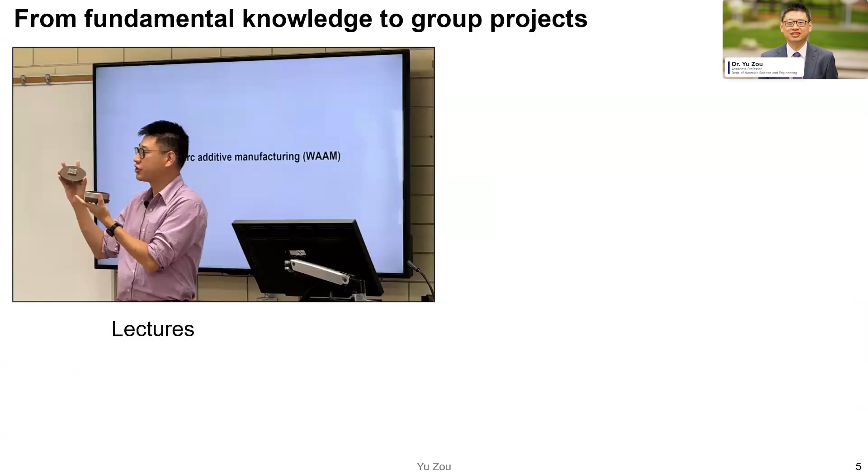It's an intensive course. In the morning sessions, I give lectures on the fundamental knowledge of additive manufacturing, and in the afternoon, students have a group project and discussion with the opportunity to do hands-on projects. Toward the end of the course, students have the opportunity to give a presentation to share what they achieved.

Over the past few years, about 200 students have taken this course, and we've gotten great feedback. Particularly this year, we got a chance to visit our industry partners, and the students had the opportunity to see what's really going on in real industry.

We first visited a company called Burloak Technologies in Ontario, and the students got a chance to see different additive manufacturing equipment, talk to the team there, and we even built up a research collaboration.

The second company we visited is Exco Engineering, a leading company in die casting, where we learned how they use additive manufacturing techniques in the die casting process.

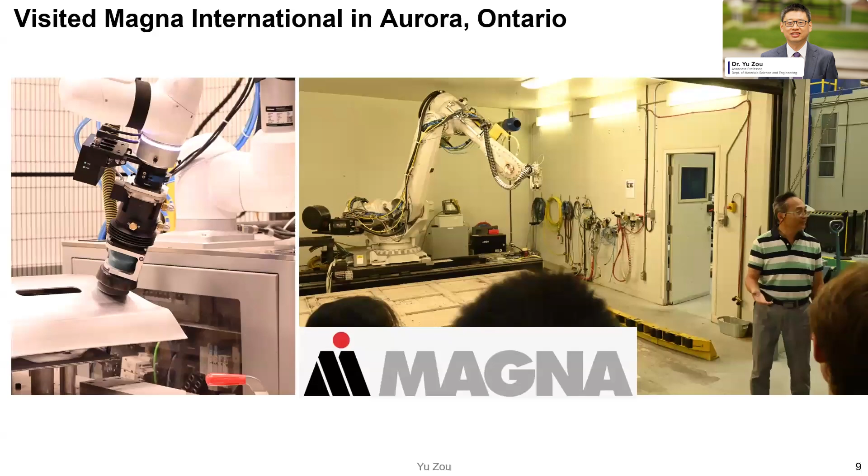Now I'm going to use the next half an hour to give a quick introduction to additive manufacturing techniques and where people can use additive manufacturing.

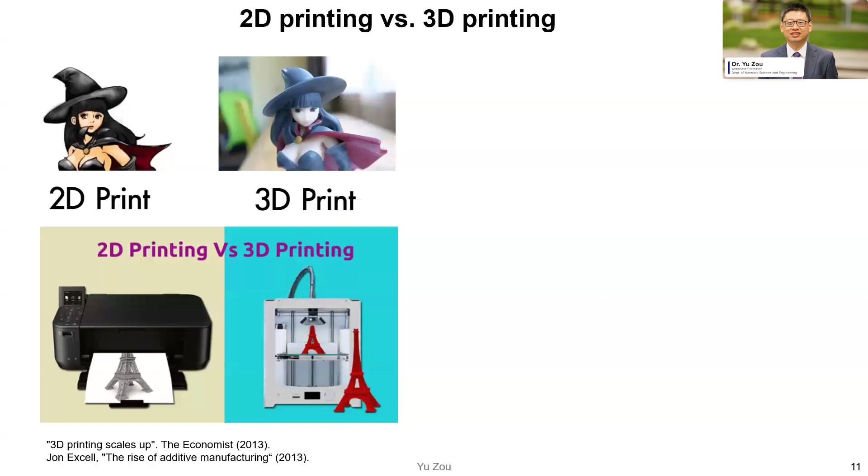First, I want to briefly talk about the term 3D printing. I think most of the audience are very familiar with 2D print and 3D print. Basically, the 3D printing process involves eight stages.

First, we create a CAD file, then transfer it to an STL file, then transfer the file to the machine, and set up the machine with printing parameters. Then you build up your part, remove the supporting structure, do post-processing, and finally move to the final application.

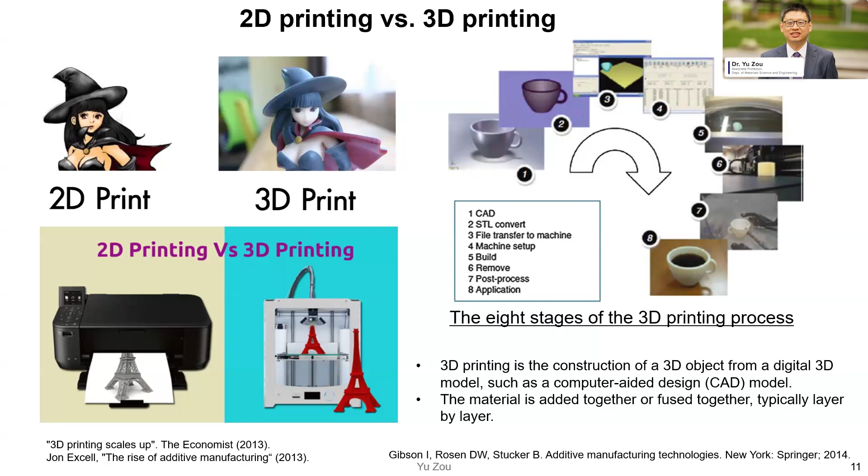The 3D printing process is based on the concept that material is added together or fused together layer by layer. I think most people are familiar with this concept and procedure of 3D printing.

Now people may wonder, sometimes we use the term 3D printing, sometimes we use the term additive manufacturing. What's the difference between them?

Basically, there's not a big difference between these two terms. Additive manufacturing is a formalized term for what used to be called rapid prototyping, or more popularly right now, 3D printing. But 3D printing is generally used to describe entry-level printing processes, like printing polymers. You can see in the image on the right an FDM process, which we normally call polymer 3D printing.

For AM, additive manufacturing is typically used to describe more advanced or precise techniques, for example for metals and ceramics, such as the technique shown here called selective laser melting. Typically, AM describes a professional production technique which is clearly distinct from conventional methods of material removal, known as subtractive manufacturing.

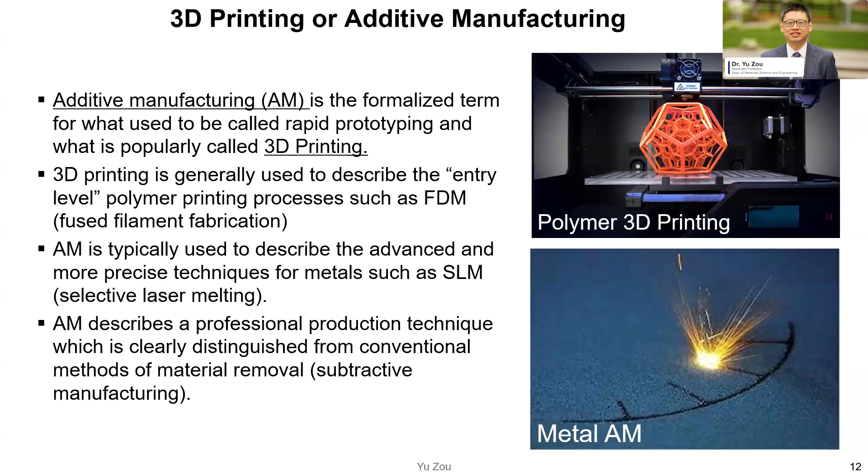People may ask, what's the difference between subtractive manufacturing and additive manufacturing? Here's a comparison. For example, if you want to make a 3D object, for subtractive manufacturing you start with a raw block of material, machine down the parts you don't need, and create a 3D part. But this leaves waste material.

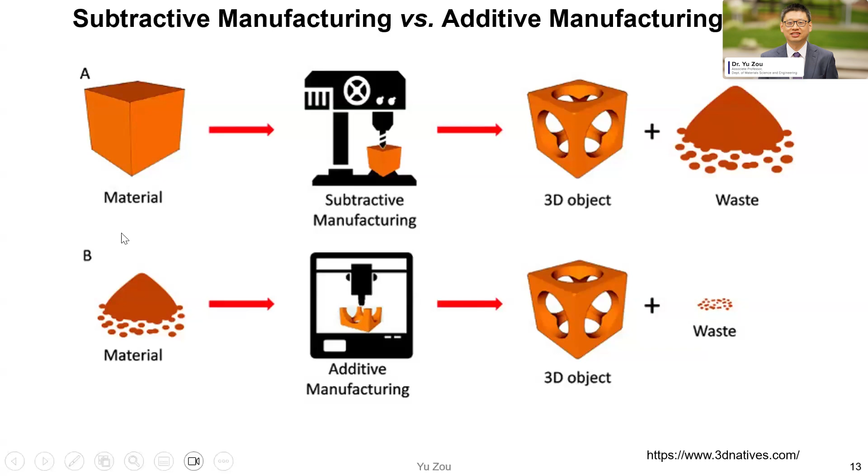For additive, basically you start with either powders or wire, then use a 3D printer to build up a part layer by layer to make a 3D part. The amount of waste is typically small. So you can see there's a big difference in the concept of how we manufacture a part.

For metals and structural applications, conventional manufacturing methods include molding, casting, forming, and machining. For example, this is a typical process to fabricate an engine block for the automobile industry. If you want a new design, you typically spend a lot of time and money designing new molds.

This is another conventional manufacturing process: forging, rolling, and then for the final part you need to do machining to get the final product. However, for additive manufacturing, you don't need this process—you use a laser to melt the powder particles layer by layer, creating a part without any molding and with a very simple post-machining process.

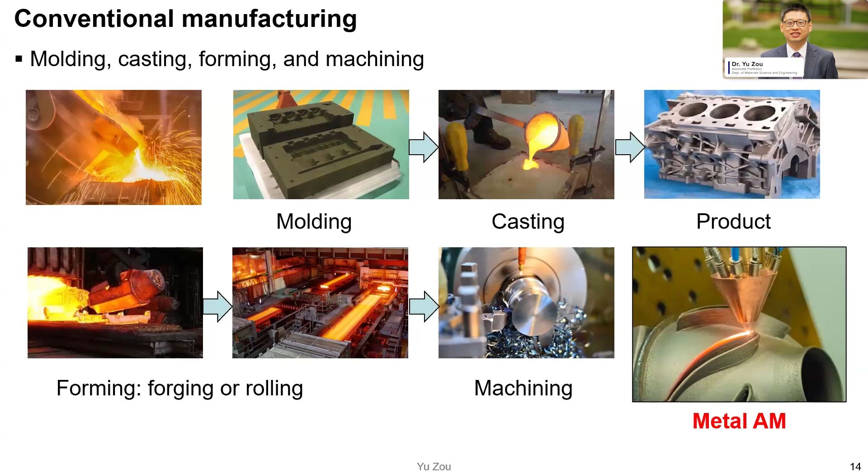3D printing or additive manufacturing is not new. The first printer was invented in the 1980s, mainly based on polymers. There was recent development, with companies building up polymer printers and metal printers. Particularly from 2015, there's been big growth in the AM community.

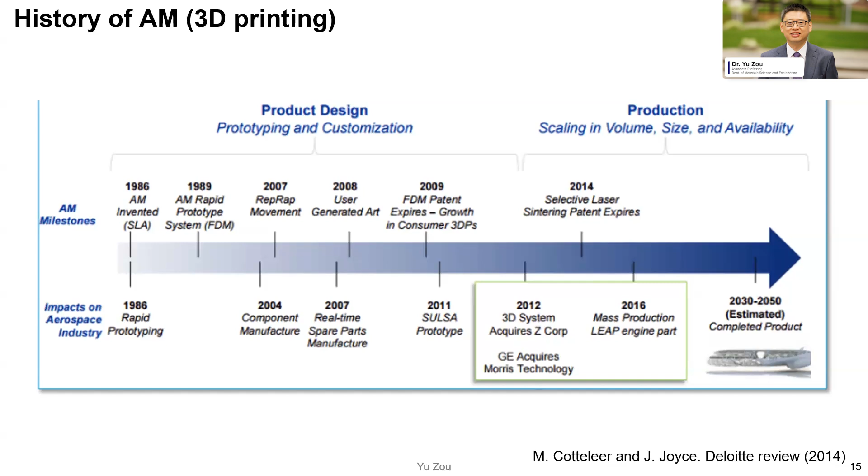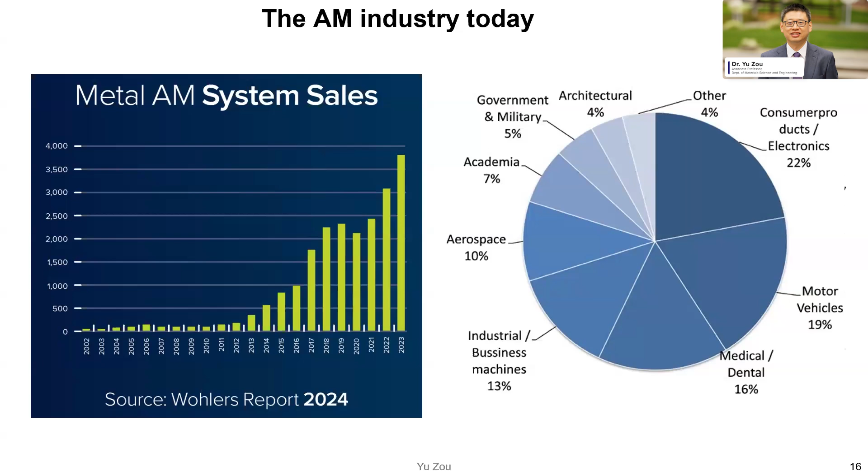Let's talk about where we can use metal additive manufacturing for industrial applications. First, we want to ask what could be the cost and value analysis, and the advantages and disadvantages of additive manufacturing compared to conventional manufacturing. Let's take a look at the cost.

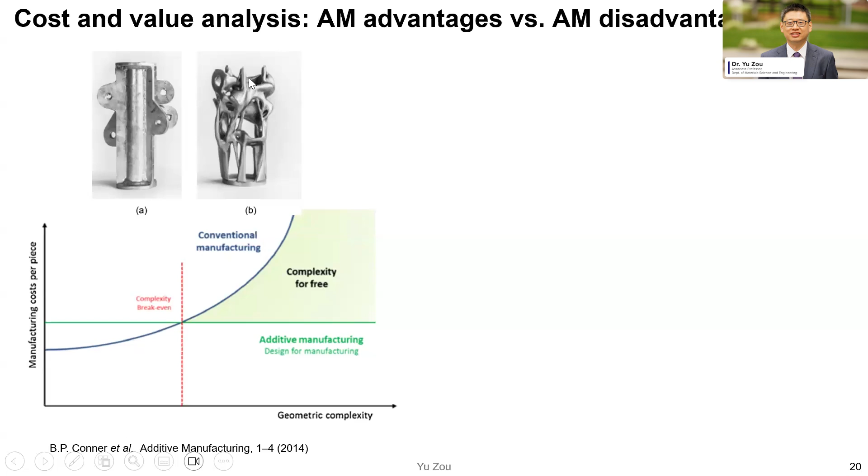Let me give you two examples. In picture A, this is a relatively simple part, so the cost could be lower using a conventional manufacturing method. But for the part in picture B, showing a very complex shape, the cost could be lower if you use an additive manufacturing method.

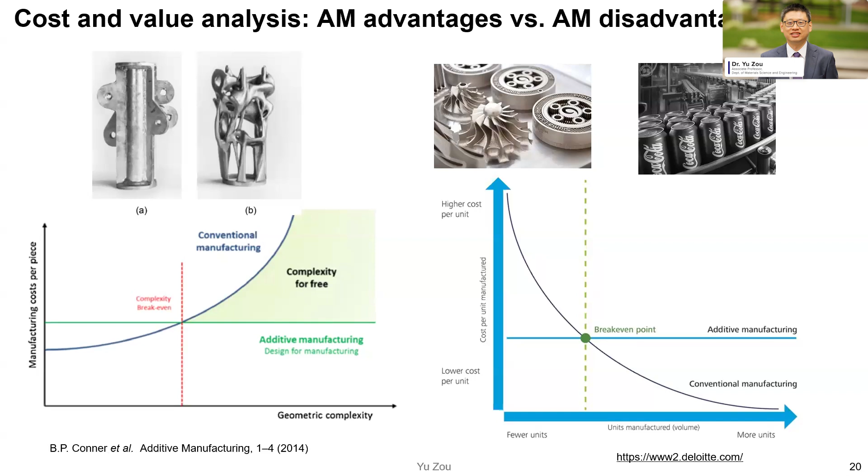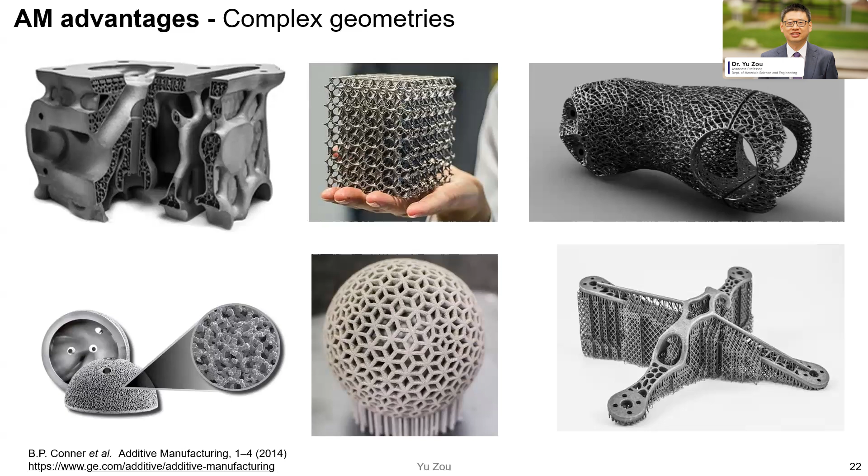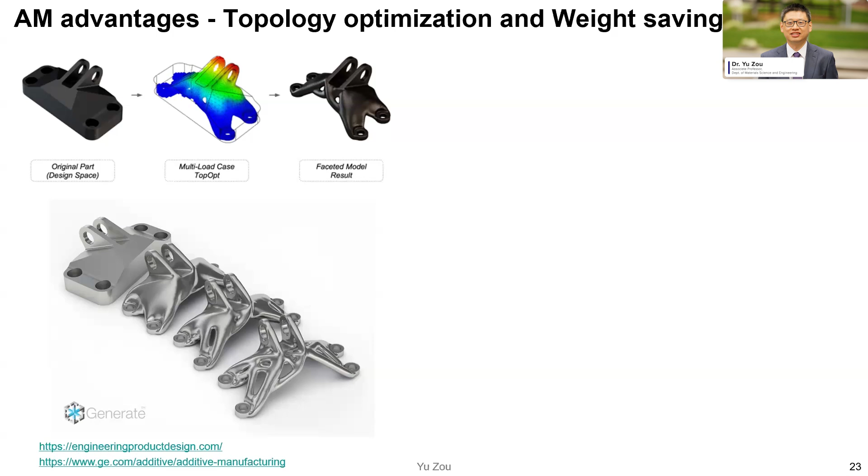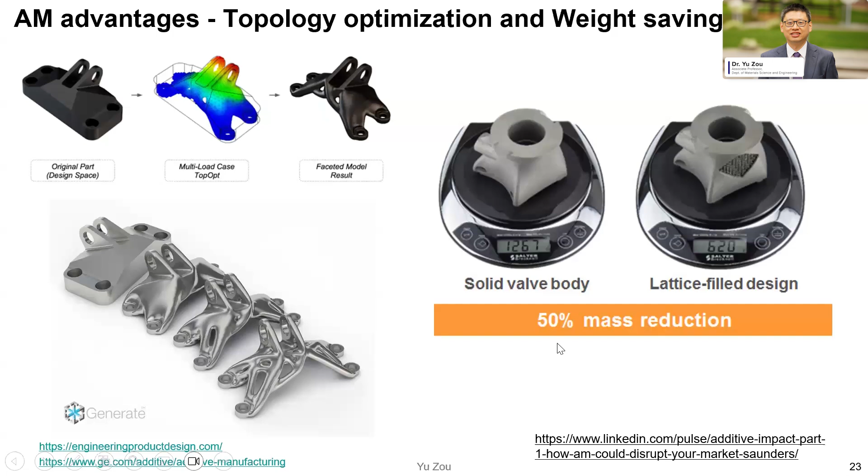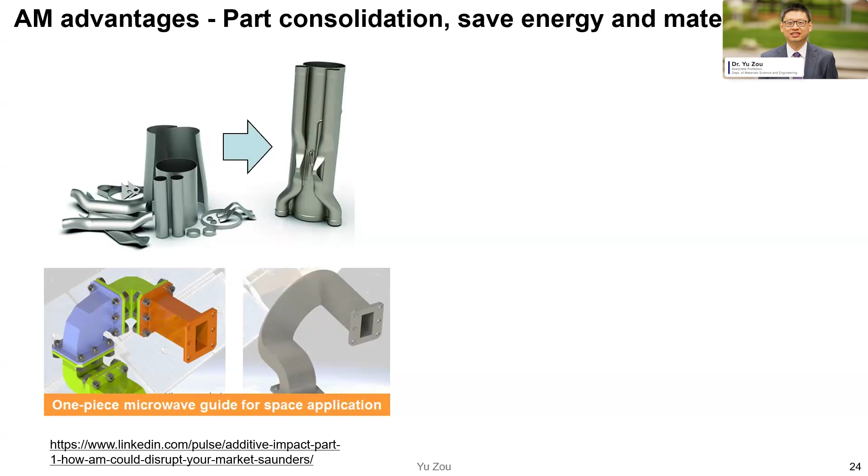For example, here I can show you a part - so this is a part where you can see we do not need several different parts joined together, and then we can eliminate some residual stresses at the joint areas.

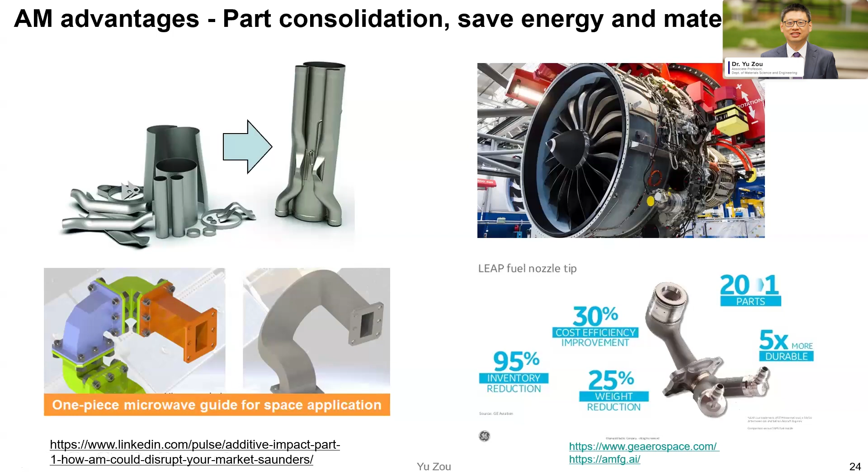A very famous example is the GE LEAP fuel nozzle tip, used in GE engines. Using additive manufacturing, they went from an original 20 parts down to only 1 part, increasing durability, decreasing weight by 25%, and also increasing cost efficiency. This could be a really good example of how we can use additive manufacturing.

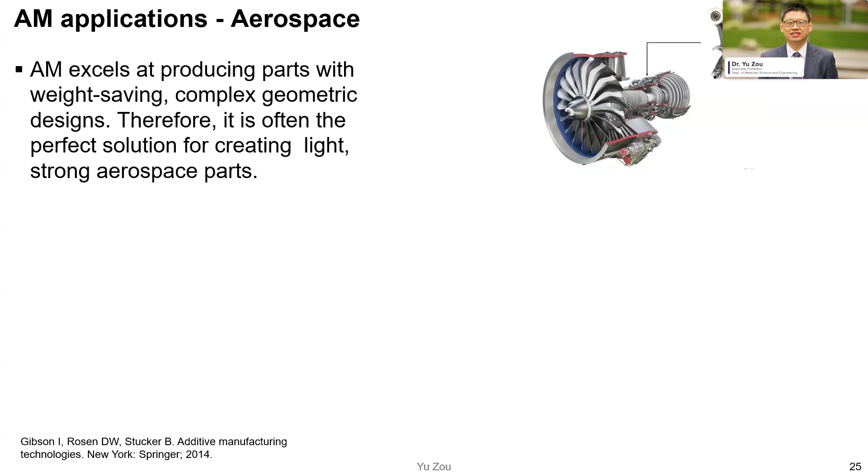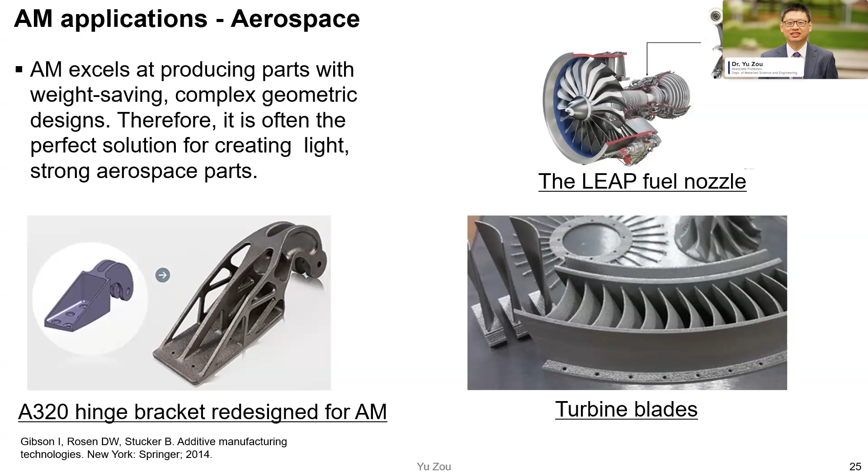For applications, as I mentioned, additive manufacturing has been widely used for aerospace applications, from fuel nozzles, turbine blades, to some structural applications in aircraft. We can also use it for space applications.

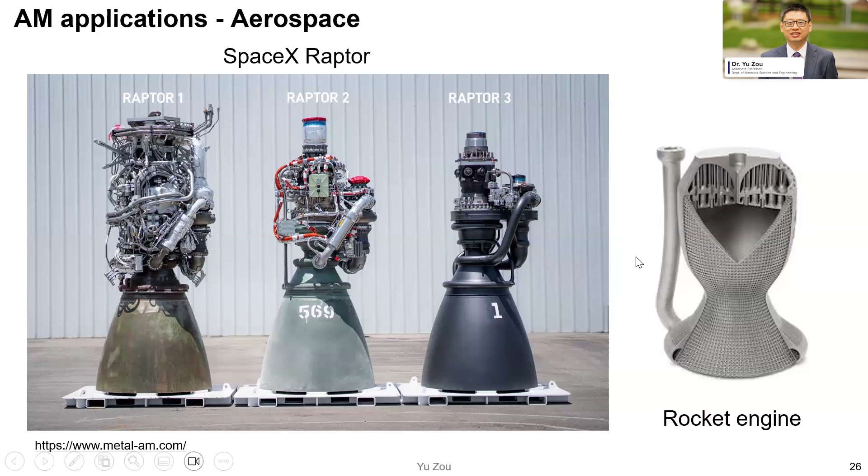This is very recent news - you can see SpaceX's three different generations of their engine, going from a very complex design to a simpler design. In this process, additive manufacturing technique helps make a few parts together rather than joining different parts, which makes the design very complicated. So this is for aerospace applications.

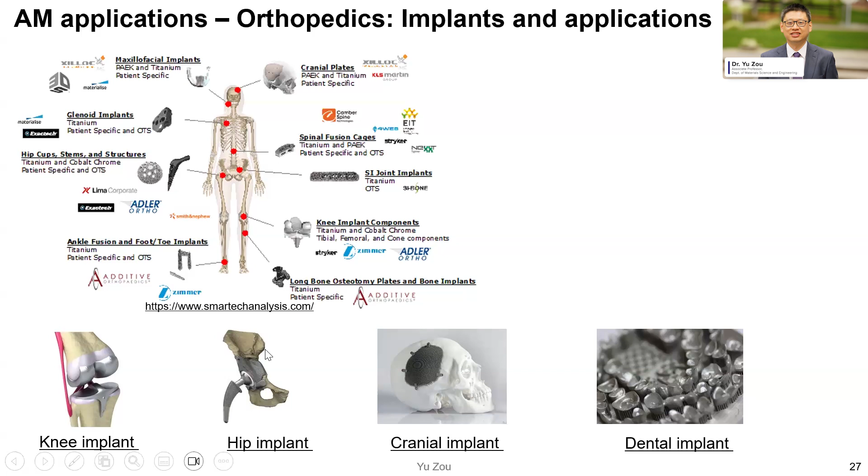Additive manufacturing also has a broad application for the biomedical and health field, particularly for implants. The main reason is additive manufacturing can make a part really customized. For example, different patients have different requirements in terms of age and activity level, so using additive manufacturing methods, you can make parts customized to the patients.

Another advantage is using additive manufacturing, you can make detailed structures like a porous lattice structure. This can help the bone grow into the implants.

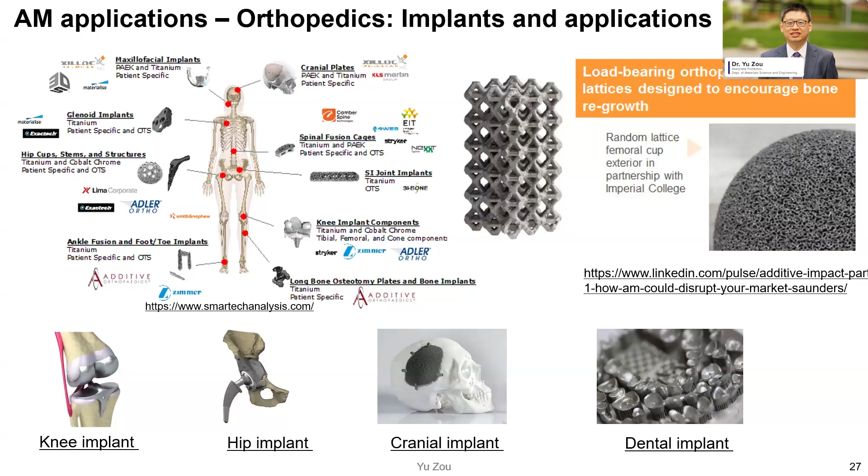Toward automobile applications, the automobile industry is very sensitive to cost. Since additive manufacturing is still a relatively expensive process, there aren't a lot of direct applications like printing parts for cars and trucks, but additive manufacturing has been broadly used for tooling applications.

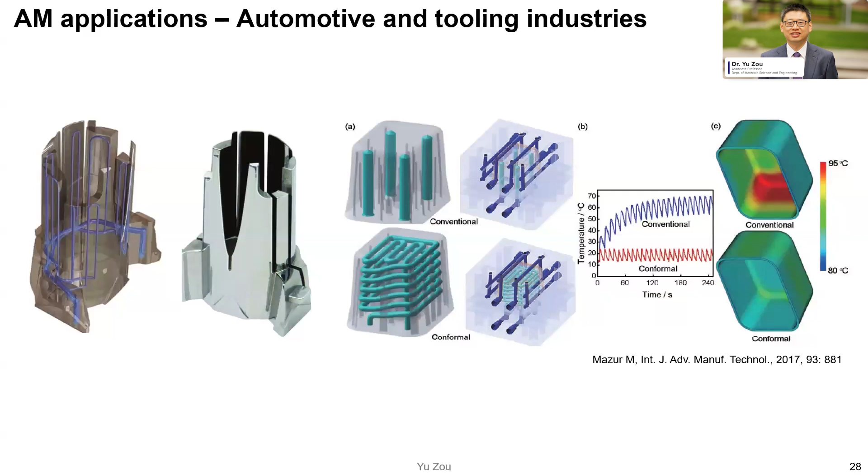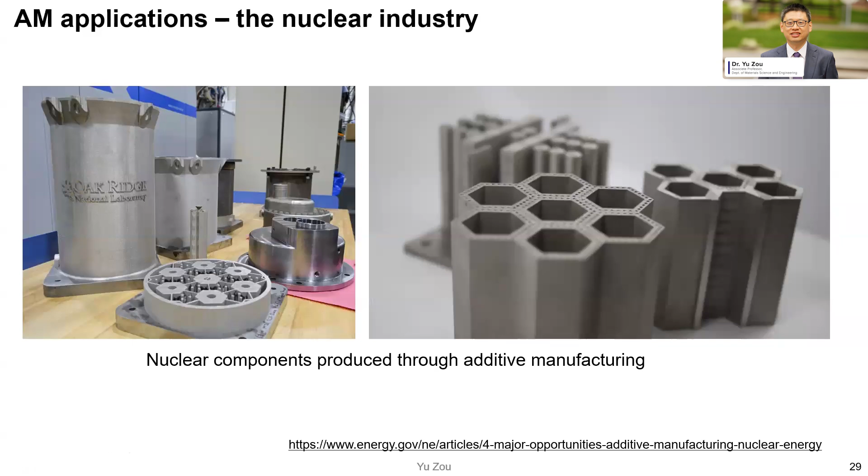Other applications include nuclear 3D printing parts for nuclear reactors. This part is made by Oak Ridge National Lab in the US, and this part can be used for nuclear reactors. Another application is additive manufacturing can also be used for the jewelry industry.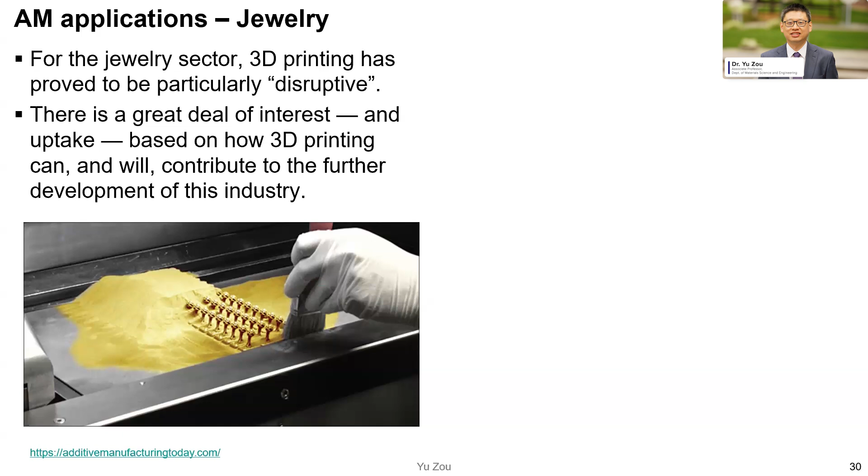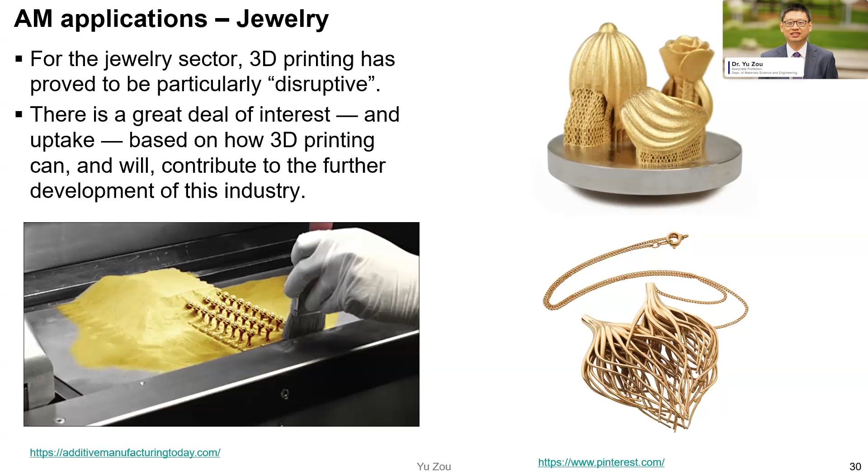For example, we can use a laser to print different parts with different geometry and customized design. So I think there's also a future market in this field. So I've talked about where people can use additive manufacturing methods for different applications. Now for the next part, I also want to give a quick overview about metal AM techniques.

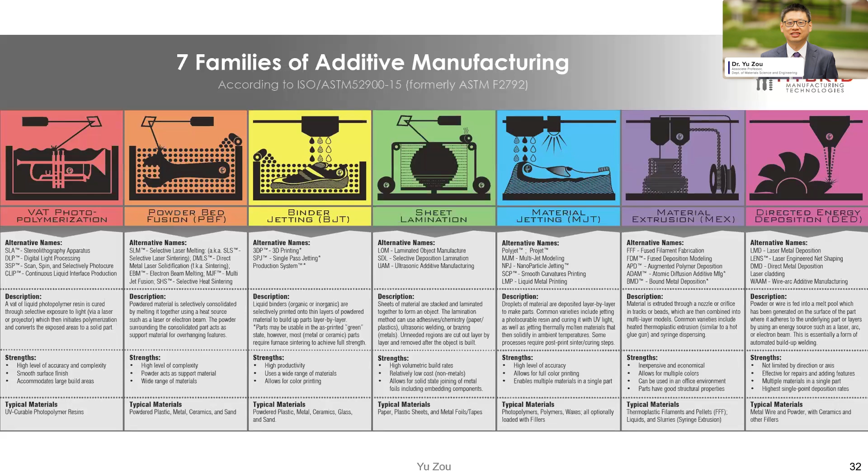Based on ASTM standard, there are 7 additive manufacturing techniques, including those for polymers, metals, and ceramics. For today's presentation, I'm going to mainly focus on 3 technologies: one is powder bed fusion, the other is directed energy deposition, and then material jetting process.

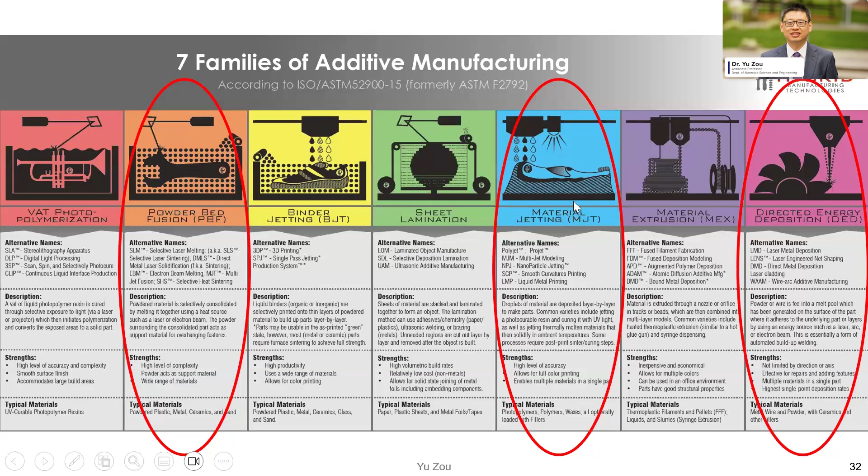The first technique we talk about is called selective laser melting, or laser powder bed fusion. Basically, we use a laser that goes to a scanning mirror, and then the laser goes to the powder bed and melts the powder, typically metal or ceramic. This can also be polymers. And then layer by layer, we can create a 3D part.

This is an EOS M100 3D printer in our lab. This video shows us laser printing the metals layer by layer. We print the first layer, and then the recoater will add a new layer of powder, and then the laser will melt the same area, and layer by layer we can create a big part.

So you can see these parts, they're all made by this technique called selective laser melting, or people can also call it laser powder bed fusion.

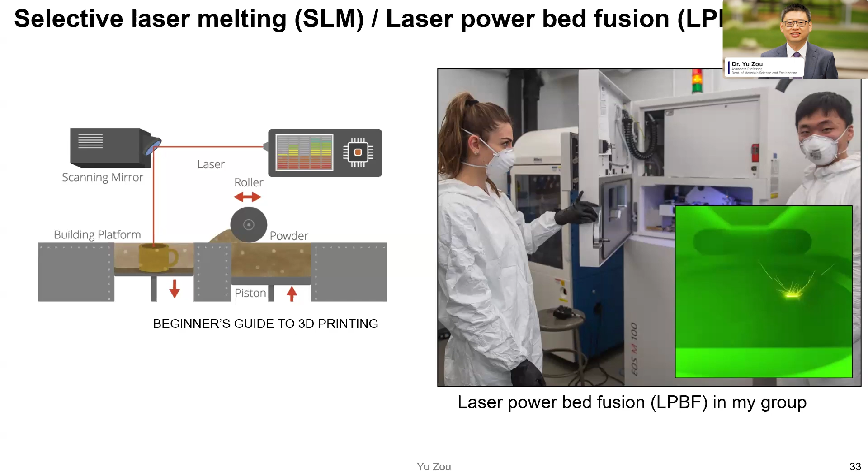In this process, typically there are a few important parameters we need to optimize and control. For example, a key parameter is called the laser energy density, which is related to laser power, how much laser power you use, scanning velocity, hatch spacing which is the distance between adjacent scan tracks, and also layer thickness. So to make a good part with high density, you really need to optimize these parameters to make a relatively dense part.

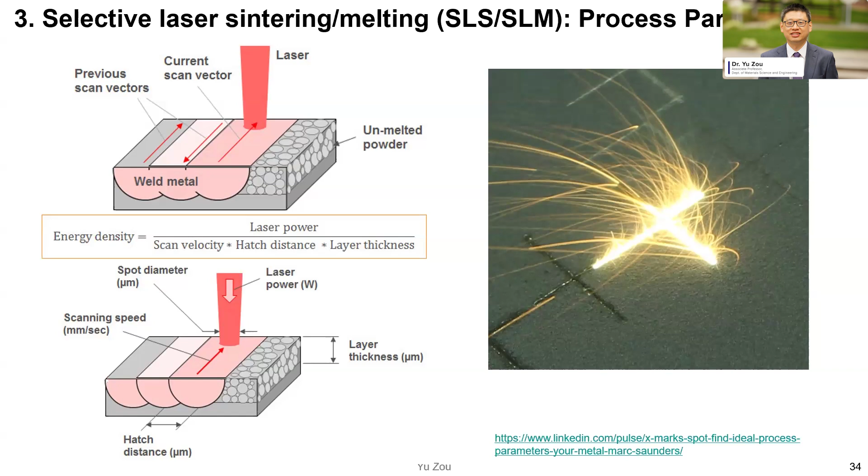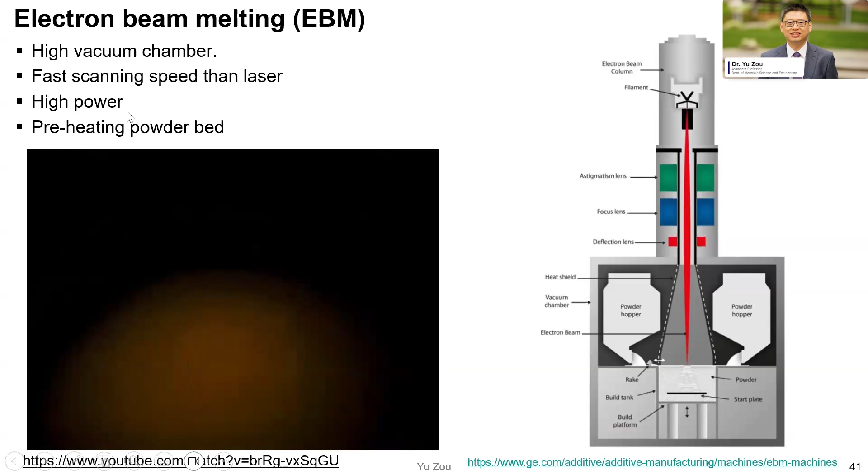Another technique very similar to laser powder bed fusion is called electron beam melting, or EBM. In this technique, we also use a powder bed, but the energy source is different. It uses an electron beam, very similar to a scanning electron microscope, but instead of using argon like in laser powder bed fusion, we use a vacuum, and the E-beam provides faster scanning speed and high power energy density, and we can also have a preheated powder bed.

This is a part made by the EBM process, and this technique is good for high volume production, for example, for bone implants and gas turbines.

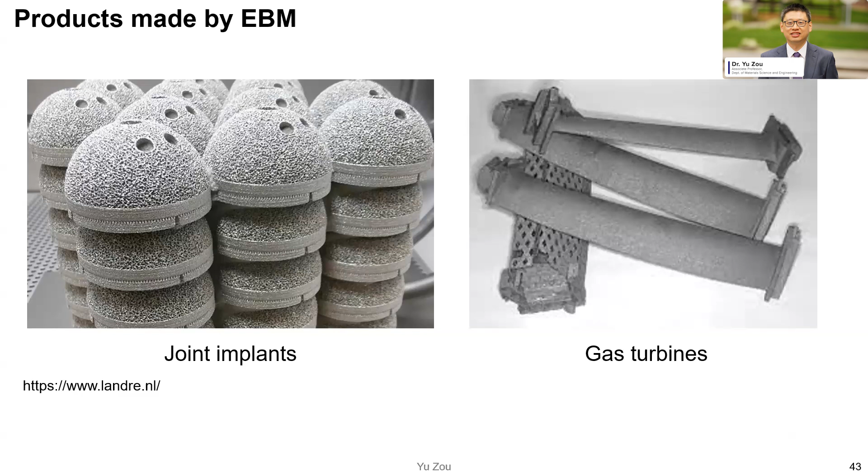I'm going to quickly talk about another technique we call direct energy deposition. In our lab, we typically use a laser as the energy source. Basically, the laser and the powder go to the same spot, and the laser melts the powder, and then layer by layer we can build up a large part.

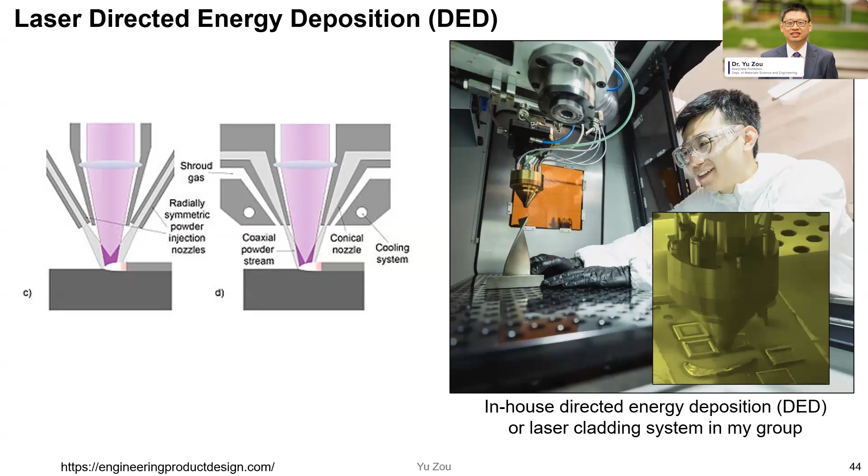People may ask, what's the main difference between laser powder fusion and DED? The main difference is DED can build up parts relatively faster and can build a larger volume, but the spatial resolution is not as good as laser powder fusion.

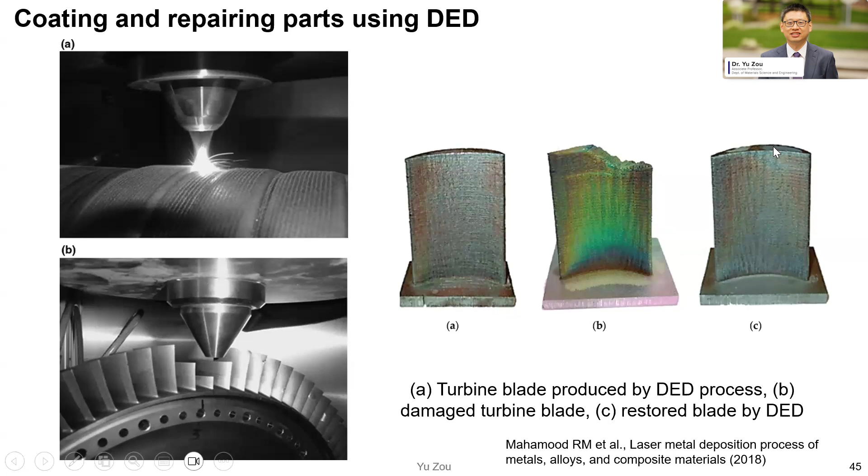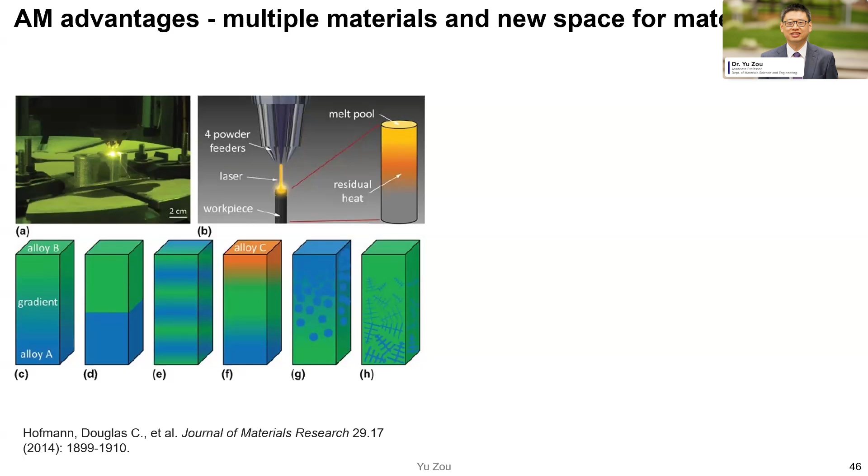This provides a good opportunity to design new materials. So based on DED, additive manufacturing process is not only used to make a part, but also to make new material.

Here I want to show you a sample. This part is made by DED, and the left side has a magnet made with a magnetic material, but the right side there's no magnetic. So we can have a gradient transition from one alloy to another alloy.

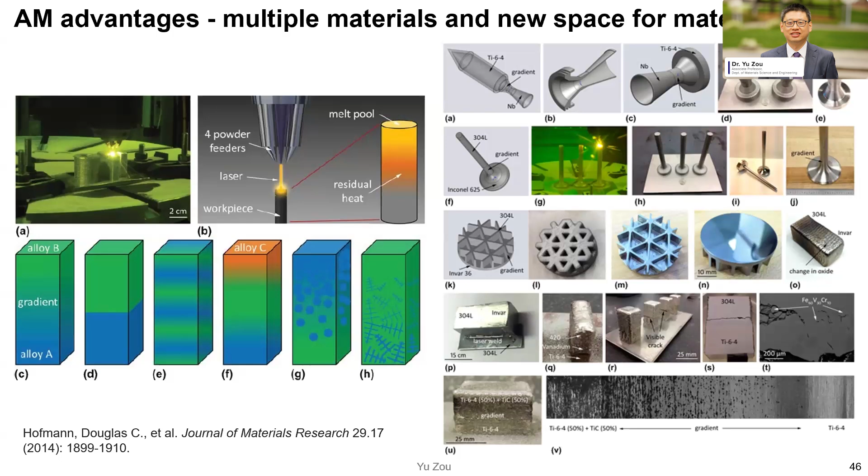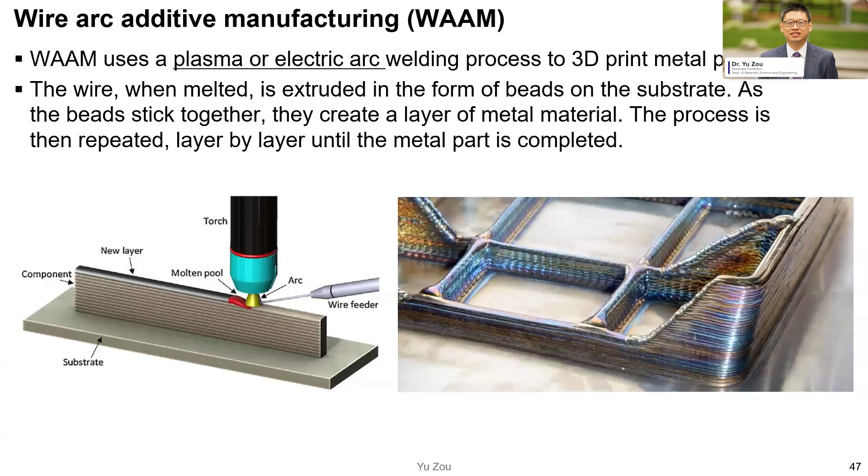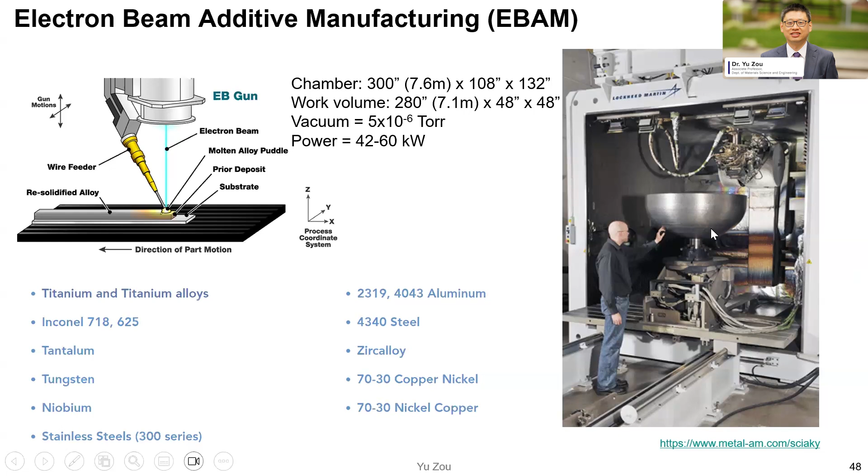Another technique is called electron beam additive manufacturing. Basically the energy source is an electron beam, and they use wire as a feeding material. You can see they can make a really big part, and the building rate is very fast. However, sometimes the surface quality might not be ideal, so post-machining is needed to improve the quality of the finished surface.

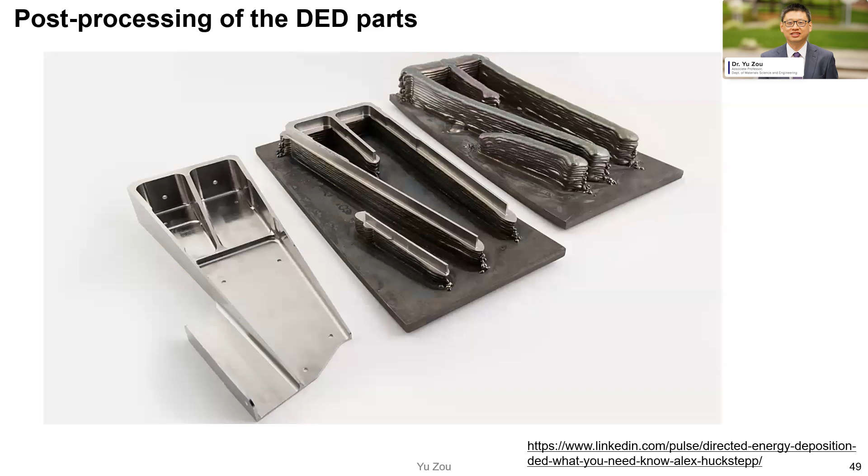So I just talked about either laser or electron beam method—this is a beam-based AM process. Now I'm going to briefly introduce a beamless AM method, mainly focusing on binder jetting and cold spray. Different from laser-based methods, for the beamless method there's no laser or electron beam.

For example, this is a binder jetting process. It's very similar to conventional powder metallurgy methods—there's loose powder and you add binder, forming a green part. Then you remove the binder during the sintering process, and through sintering you can make the part even denser.

Here I show you a sample made by this binder jetting method. You can see the surface quality is also very good. The advantage of this method is there's no laser, so the system is relatively simple, the cost is relatively low, and there are fewer safety concerns regarding lasers.

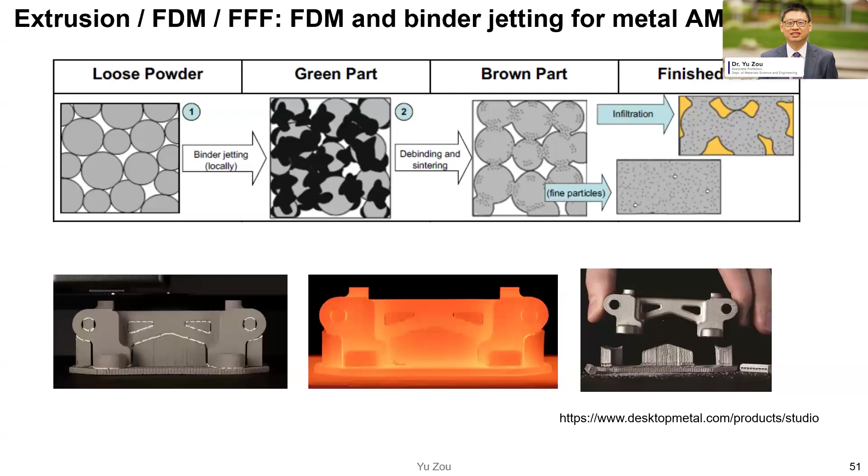The porosity of this part is relatively higher than some parts made by laser-based additive manufacturing, and for some parts that could be a problem—for example, fatigue property is really sensitive to porosity. But if the part is not very critical for fatigue, I think this could also be a good method to reduce cost.

Another method I want to mention is cold spray. Cold spray is based on high pressure gas, which accelerates metal powder particles to supersonic speed, and layer by layer they form a coating.

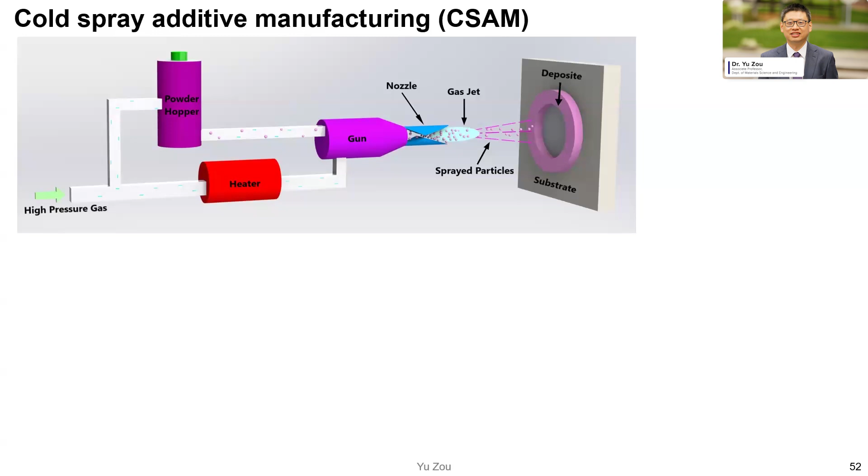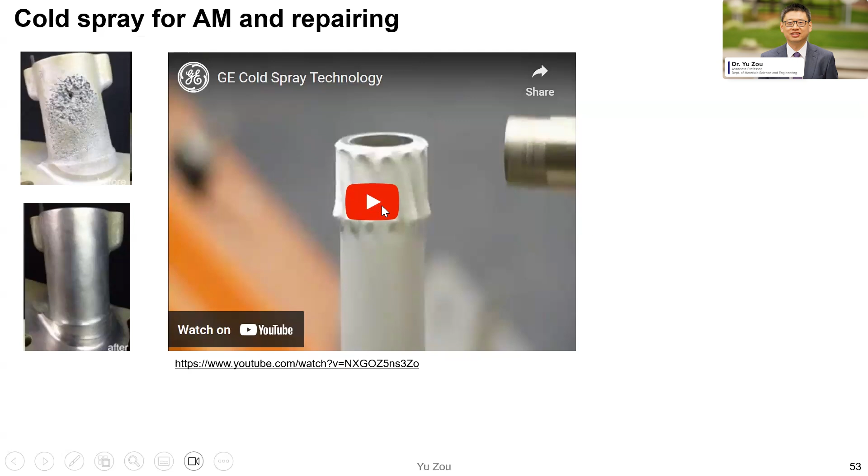Cold spray can also be used for repairing. For example, this part has some surface pitting, and you can use cold spray for repairing it. There's also a video showing the cold spray technology.

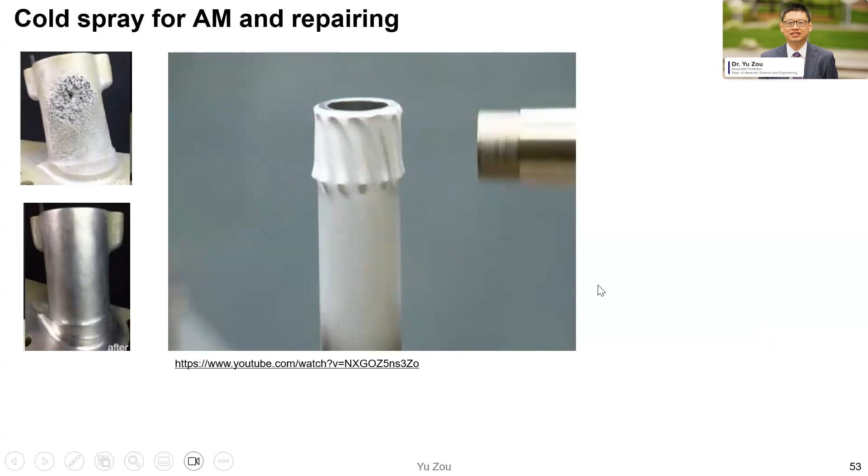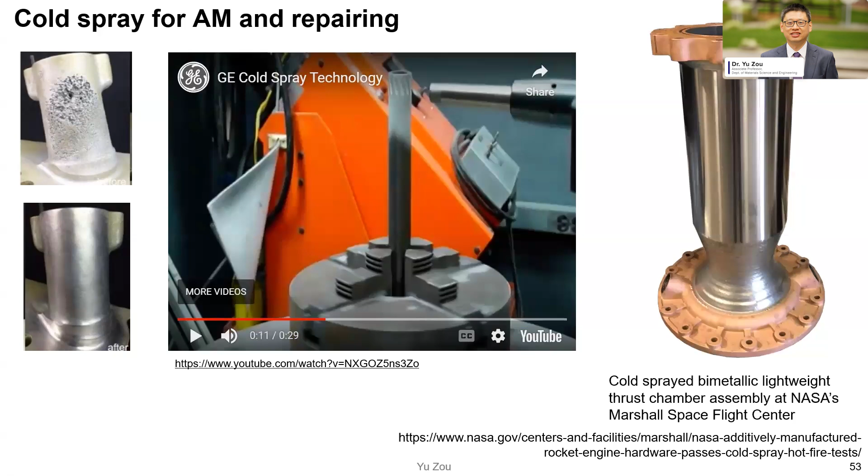NASA also used cold spray technology for their rocket engine parts. In our lab, we mainly work on the microstructure evolution of powder particles during impact, and how the powder bonds, trying to work on different material alloys to improve microstructure and mechanical properties.

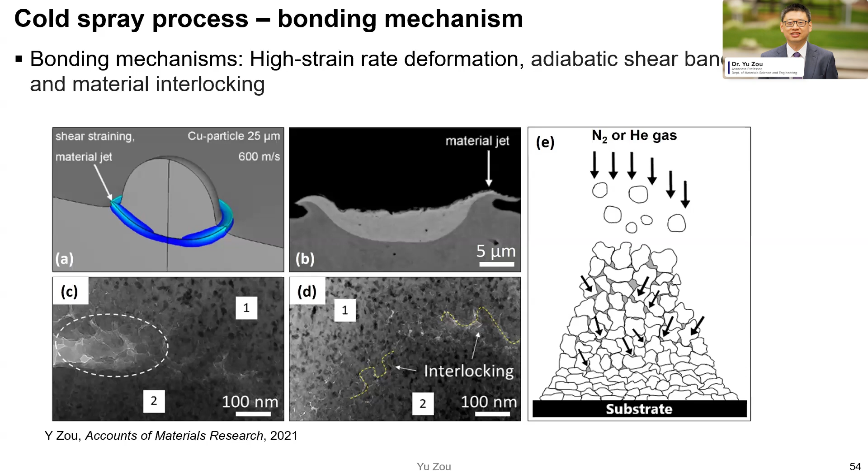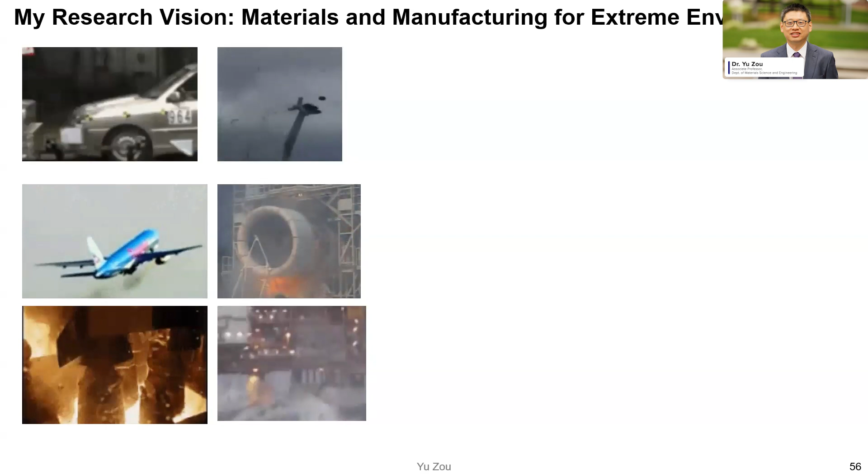For the next part, I want to quickly introduce the projects in our lab. Our research vision mainly focuses on materials and manufacturing for extreme environments—for example, high temperature applications, high speed impact, irradiation, corrosion, wear, erosion, hydrogen embrittlement, and complex loading conditions.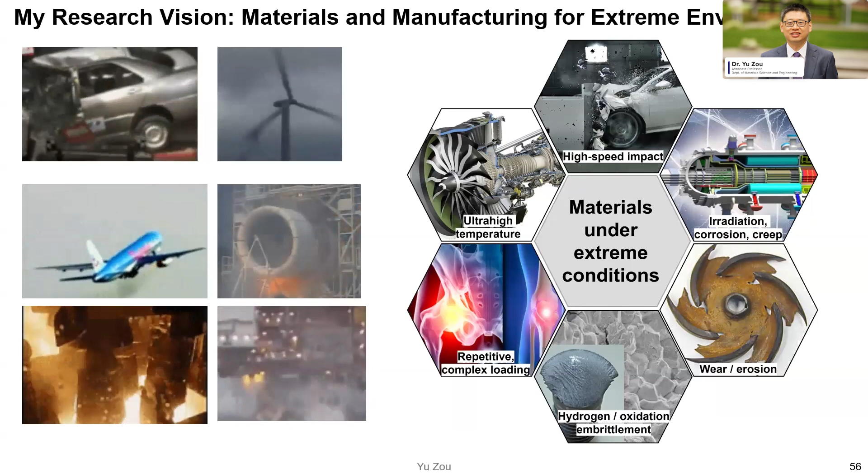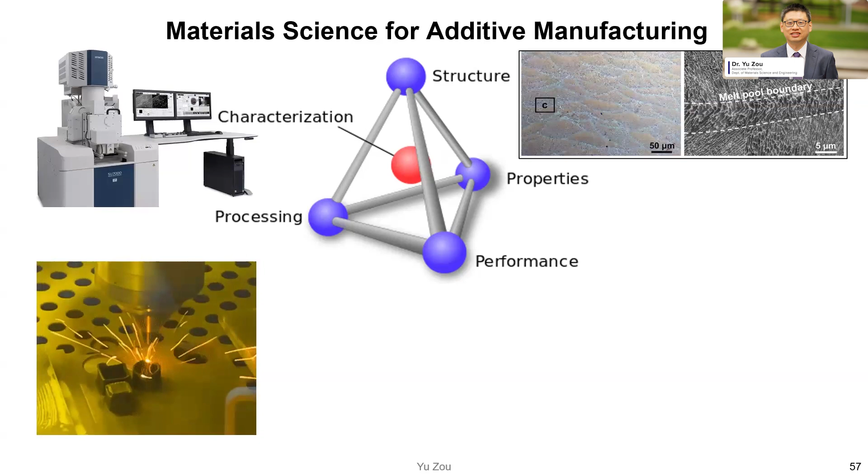We want to integrate material science research with additive manufacturing, and also use additive manufacturing to develop new materials and structures. So we work from processing conditions to characterization, microstructure analysis, mechanical testing, and finally we hope the material we produce can be used for different applications.

Okay, I also want to introduce a few projects. The first project is about metal powder, which has been widely used for different techniques. How do we select the best powders? Here is the metal powder we use in additive manufacturing technique. The metal powder needs to satisfy the powder size distribution, and also needs to have good flow ability.

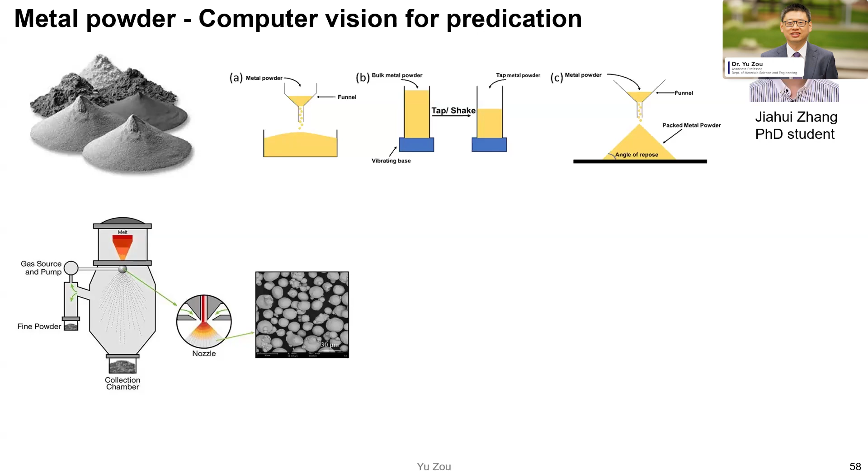In this project, we use computer vision methods to quickly predict and identify powder with good flow ability and good printing ability. This is work collaborated with GE Additive.

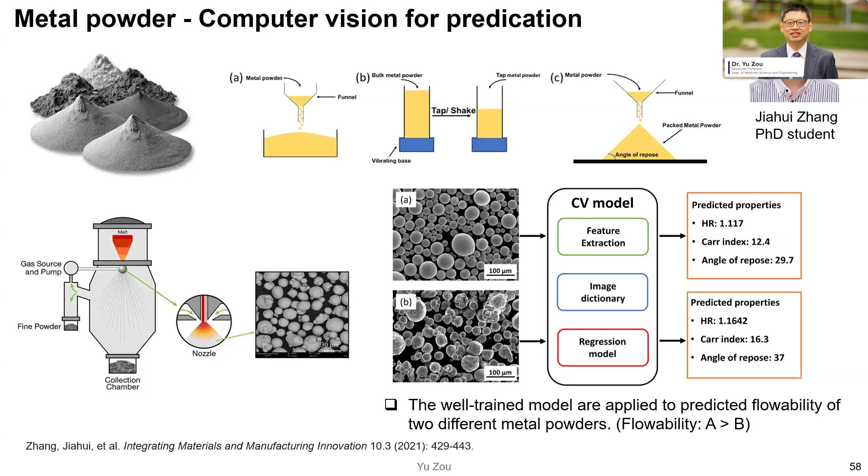Also, we work on a project about process optimization. For example, we print a part from 1D, 2D, and 3D, and then optimize the printing parameters like laser power and scanning speed to see how we can improve print quality with less defects.

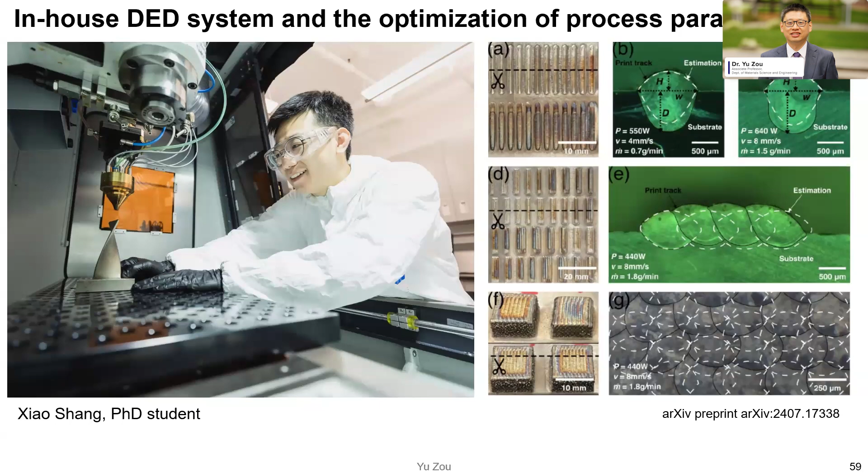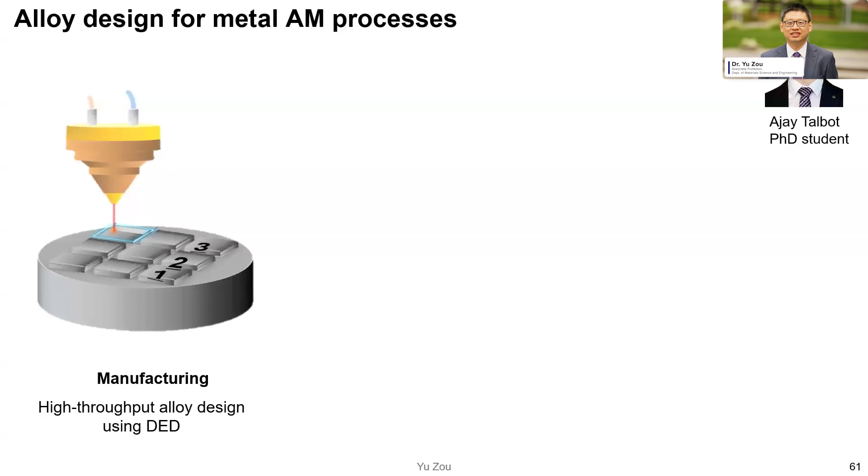Towards material science, we also use additive manufacturing methods to identify special alloys for additive manufacturing. For example, we have a project about high throughput alloy design using DED.

During the printing process, we can control the feeding rate between 2 or 3 powder feeders and control their compositions. Then we can test the samples in different compositions and identify their performance, like wear, oxidation, corrosion resistance, and also printability.

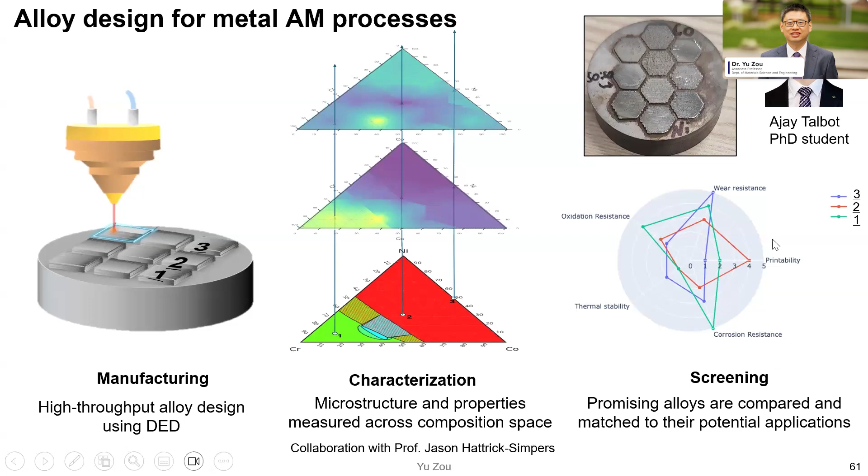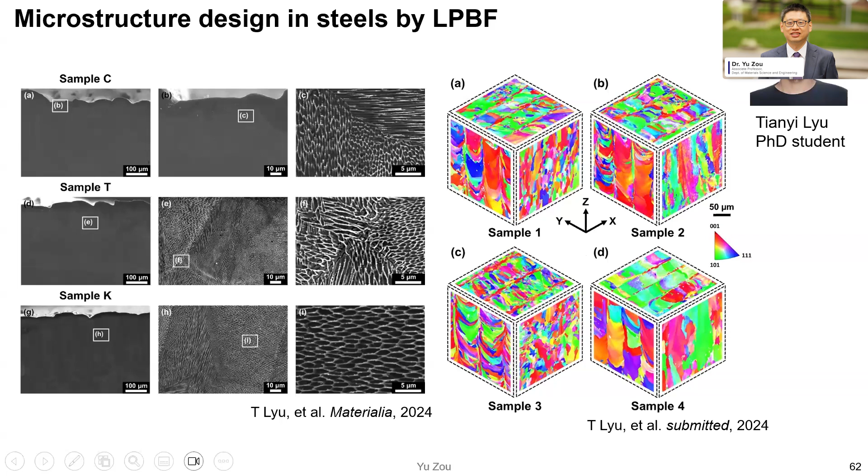Towards mechanical performance, this project is mainly focused on the mechanical properties of aluminum alloy and high entropy alloy. This is a collaboration between my lab and the additive manufacturing team at Waterloo.

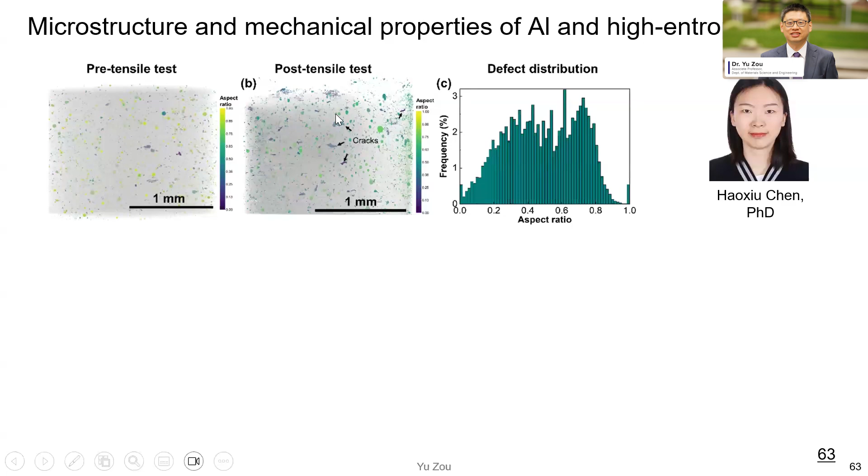So we did the tensile test of aluminum alloy, and then we characterized the pores before the tensile test and after the tensile test to identify the failure mechanism.

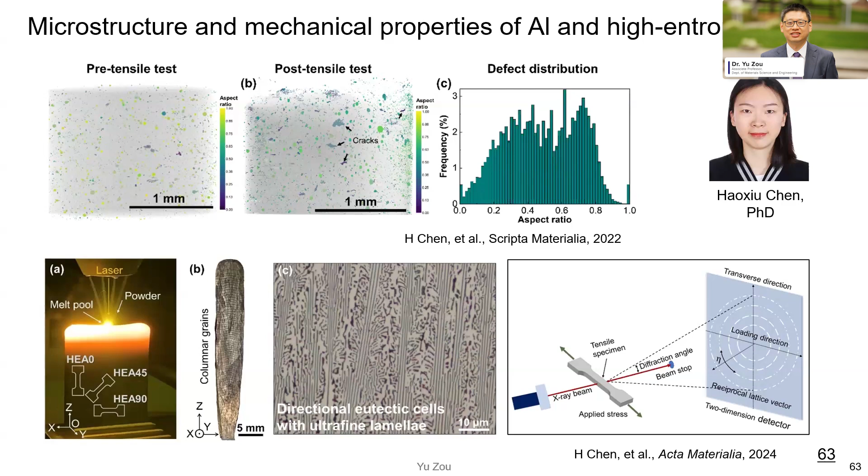Also, we work on additive manufacturing of a new alloy called high entropy alloy. They showed very interesting microstructure, and then we did an in situ tensile test at a synchrotron beamline to identify how the two phases deform during the deformation process.

So the last topic is about fracture and fatigue for titanium alloy. We mainly focus on the mechanical property and behavior.

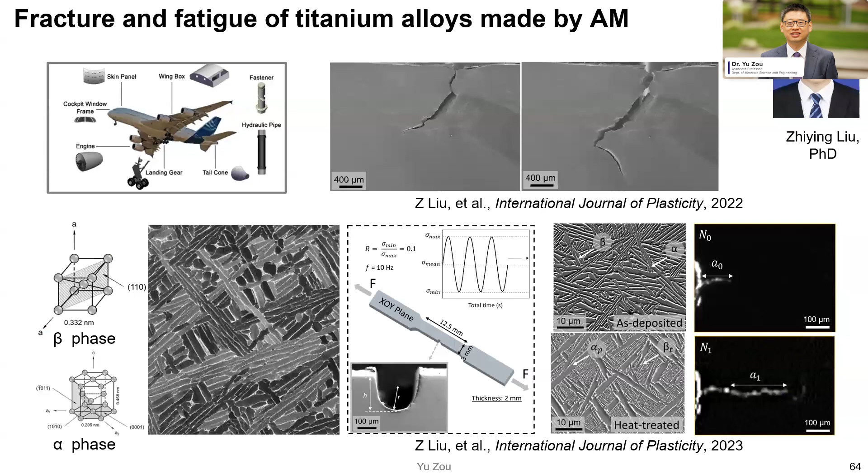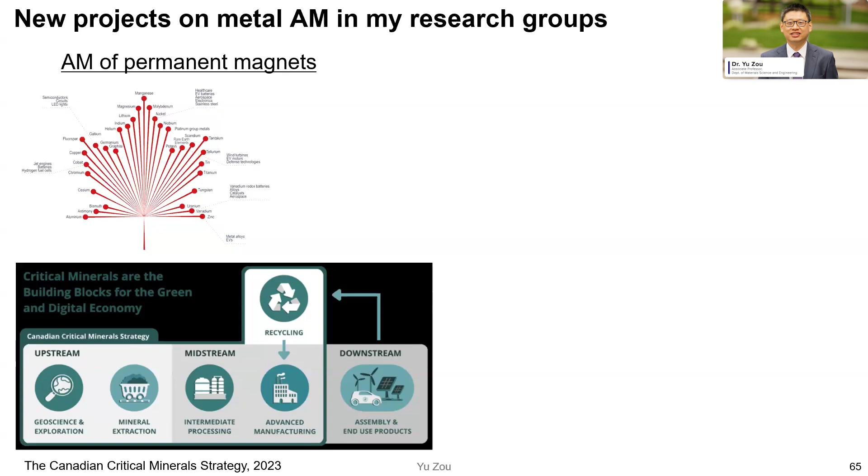There are two current new projects. One is additive manufacturing for critical minerals, mainly for permanent magnets. And another project is for small modular reactors.

So for the future, I do see there's a great opportunity to include AI in material discovery and additive manufacturing. I hope we can work on additive manufacturing mechanics and materials, toward a better engineering product.

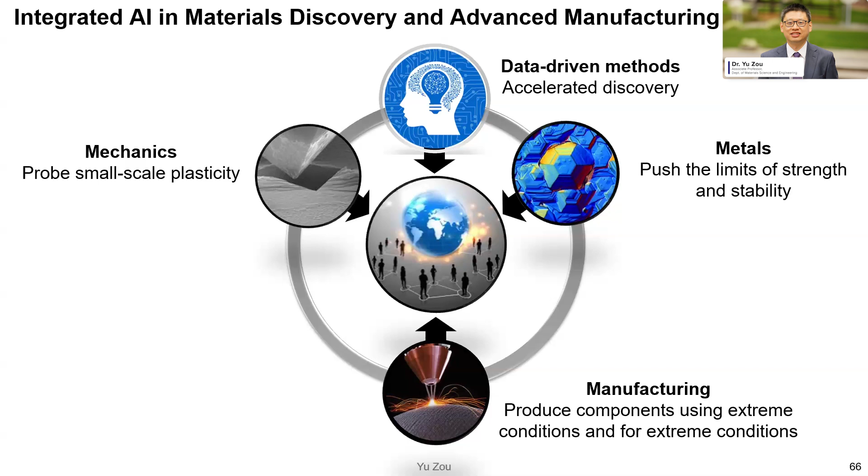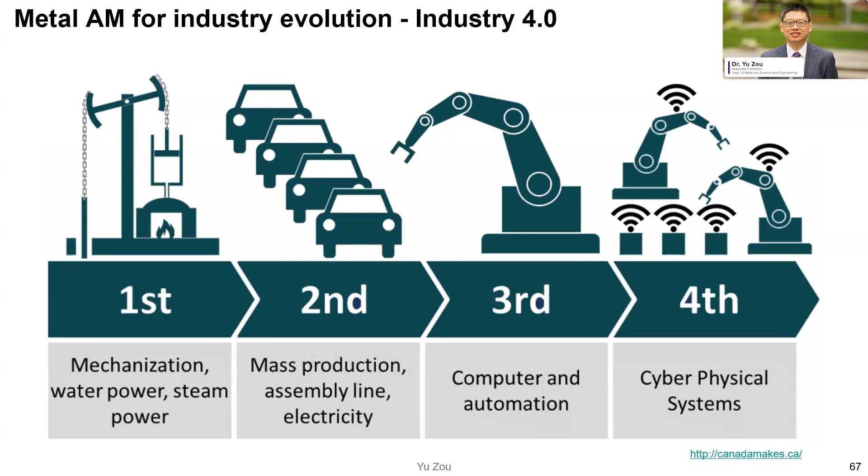For sustainable environments, towards metal AM for metal applications, I think AM provides a good opportunity for Industry 4.0. I'm looking forward to the bright future of additive manufacturing in the new industry revolution.